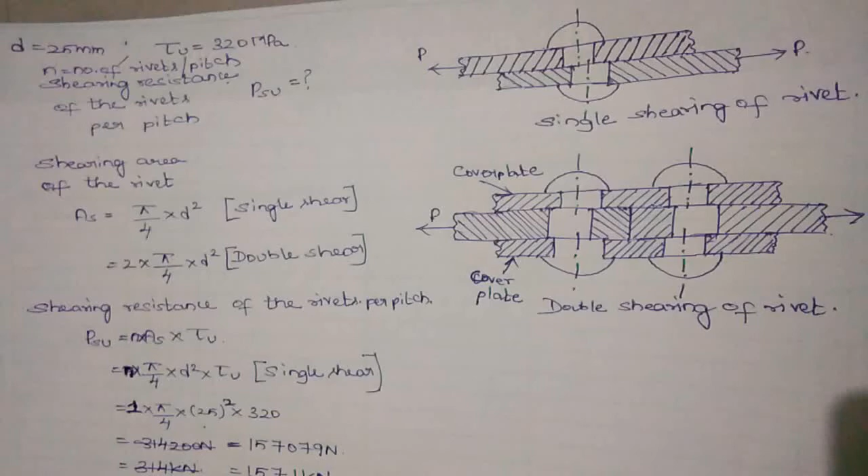This is a lap joint of two plates connected by a single rivet. Here, due to the pulling load P at the two plates, the rivet will be in shear. This is the shearing area of the rivet.

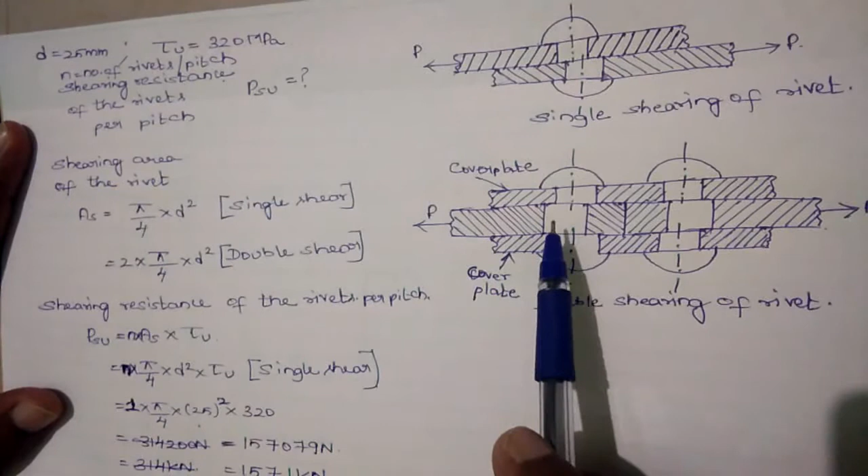This is a double cover plate butt joint. Here plate 1 and plate 2 are connected by means of two cover plates. Cover plate, and here on applying the pull to the plate on both sides, the rivet will be in shear. This is the shearing area of the rivet.

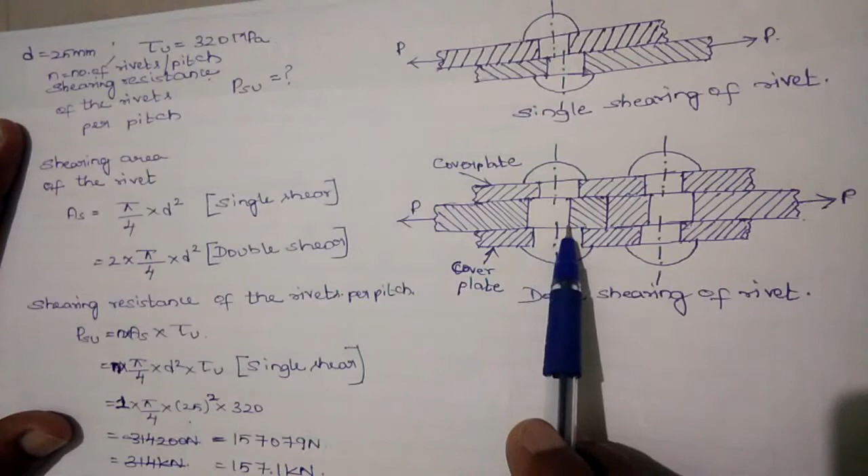Here the shearing areas of the rivet will be 2. Here this one and this one. Whereas in single shear the shearing area is only 1 cross section of the rivet, here the shearing area will be at 2 cross sections of the rivet. Now the diameter of the rivet is 25 mm. Shear strength of the rivet material is 320 megapascal.

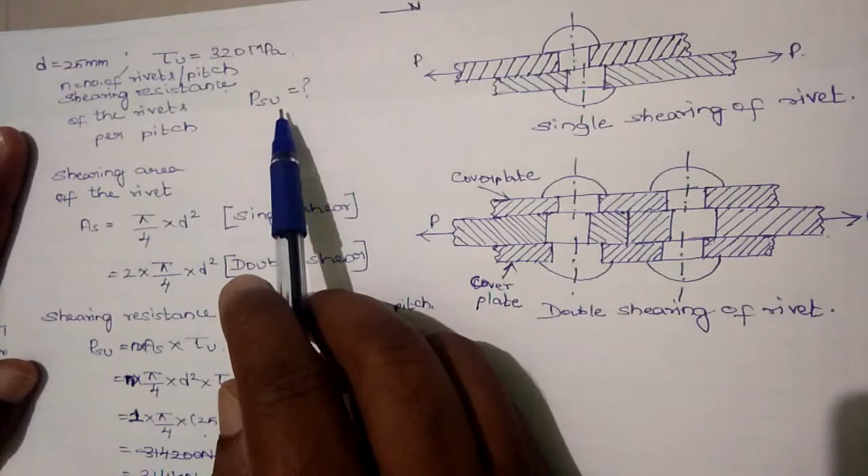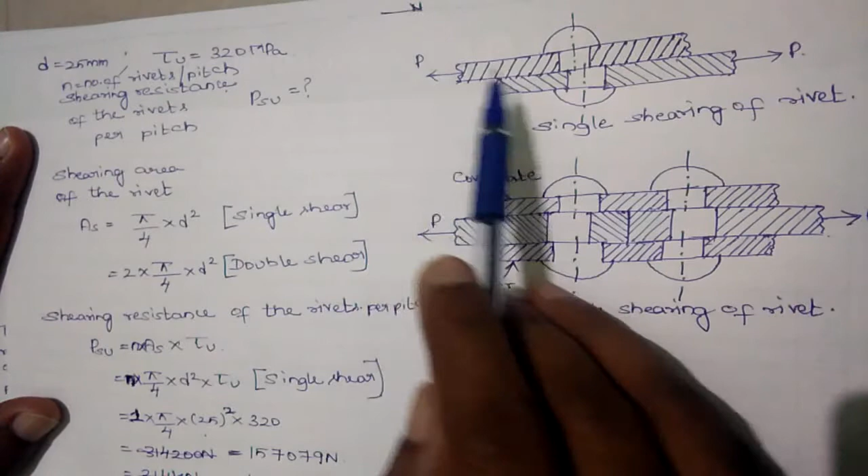N is the number of rivets per pitch, and we need to find the shearing resistance of the rivet due to pull P for both single riveted lap joint and double riveted double cover plate butt joint.

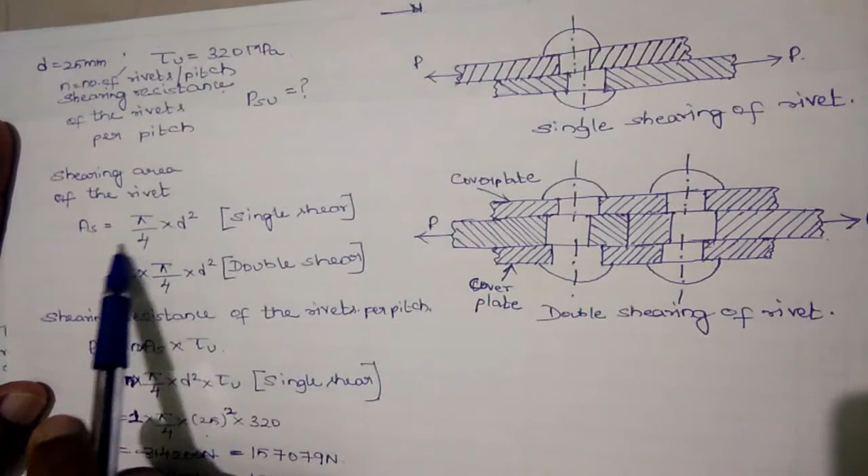Here the shearing area of the rivet is pi by 4 d squared, this cross section of the rivet, for single shear, whereas for double shear we will multiply by 2, since 2 cross sections per rivet are under shear. So the formula is 2 into pi by 4 into d squared.

Now shearing resistance of the rivet per pitch is N into area of shear into shear strength of the rivet material. Here for single shear, the number of rivets per pitch is only one, therefore we will take N as 1 into pi by 4 into d squared, the value of d is 25

squared, into the shear strength of the rivet material, which is 320 megapascal, from which we will get the shearing resistance of the rivet in single shear as 157.1 kilonewton.

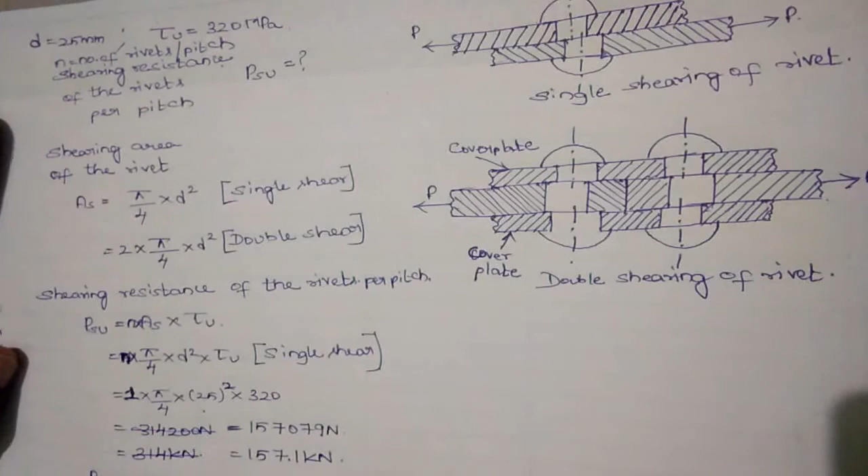Now shearing resistance of the rivet per pitch for double shear. Here there are 2 rivets per pitch length, and the shearing area per rivet is 2 cross sections of the rivet. Therefore the formula will be N, number of rivets per pitch, into 2, since per rivet 2 cross sections are in shear. 2 into pi by 4 into d squared, area of the rivet, into shear strength of the rivet material.

Here N, number of rivets per pitch, is 2, so we multiply 2 to the shearing area of the rivet into 320, shear strength of the rivet material. Here since we take the value of N as 2 and we multiply it to the area of the rivet,

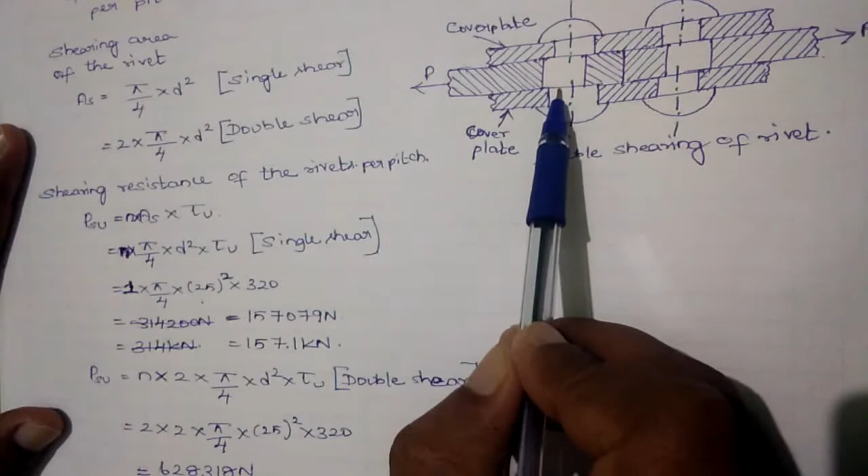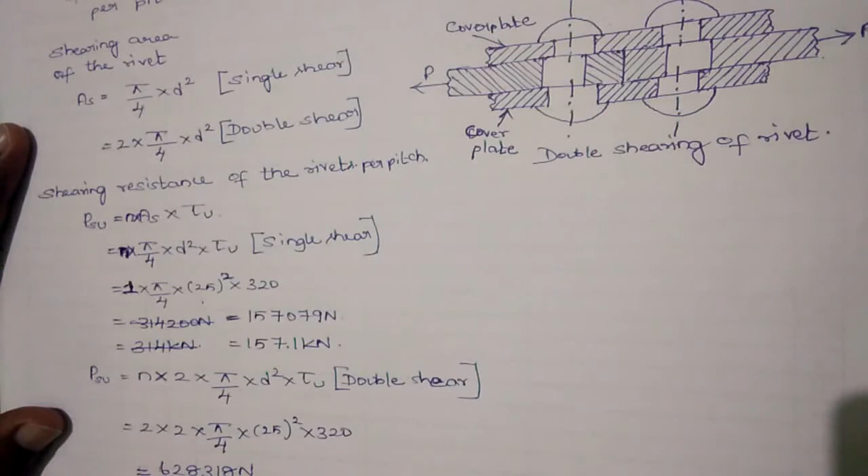here it is visible the total shearing area of the cross section of the rivet is 4. Here this is 1, 2, 3, 4. So 4 times the area of the rivet. On multiplying, we get the shearing resistance of the rivet as 628.3 kilonewton in double shear.